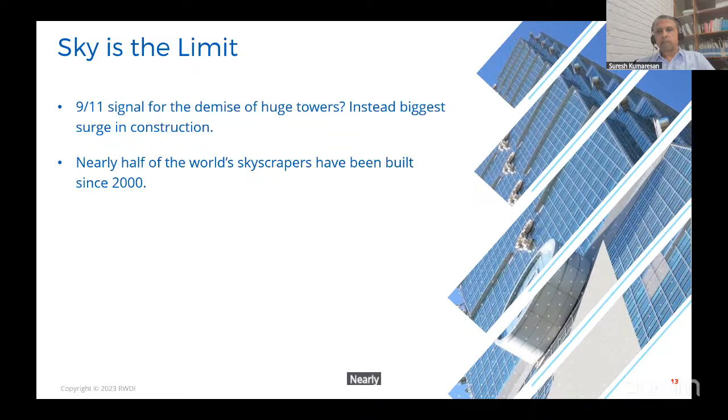Now we are even thinking about vertical cities. We want to live and die basically in cities like this: live on one floor, shop on another floor, attend parties on another floor, etc. The idea looks a bit crazy, but it can happen. There are projects like that at least in the planning stage at this point.

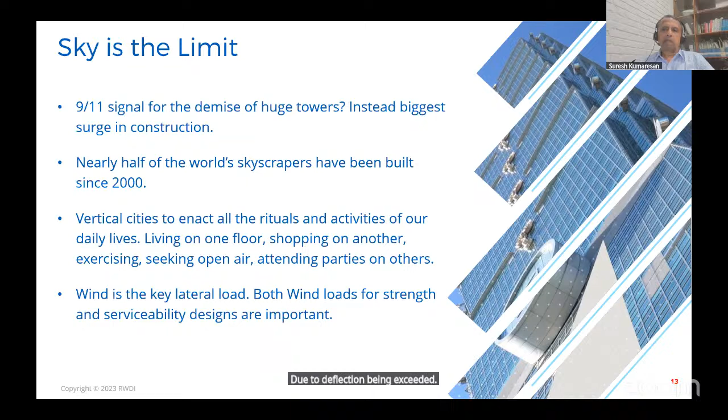As you all know, wind is the key lateral load whenever buildings are super tall or taller—roughly more than 30 or 40 floors is going to be governed by wind. Previously we used to talk about only strength all the time, but nowadays serviceability is also a serious issue, because sometimes a building may pass strength-wise but may not pass serviceability-wise due to deflection being exceeded or even acceleration having some issues as well.

So now you can see why we are interested in such tall buildings, and wind loading on tall buildings. You can see when wind is blowing, there is a chance that people can perceive motions.

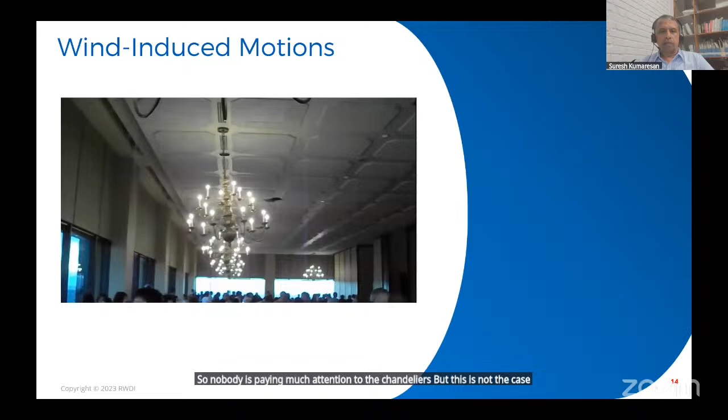This is one of those videos taken not on a super tall building, maybe 170 or 180 meters tall. When the wind is blowing, the chandeliers are moving, but people are not noticing, maybe they think there's some party going on, so nobody is paying much attention to the chandeliers. But this is not the case when you are alone in a bedroom. If something is moving, you immediately know something is moving and you'll be really alarmed.

So it's all about the perception and your surrounding scenario. Because if you are in a group, you may be tolerant to take more motion, but if you're alone, you're not willing to take more motion.

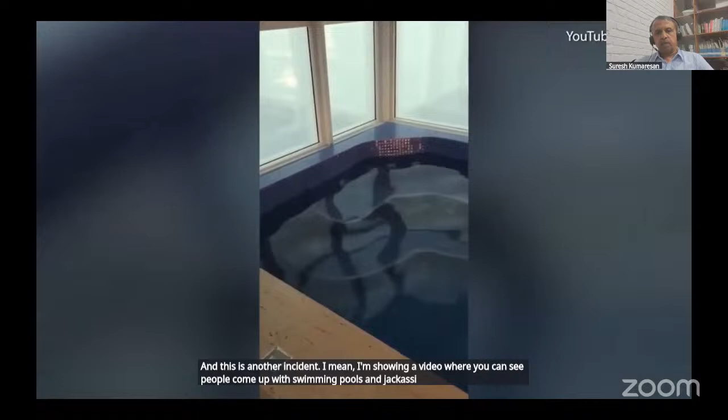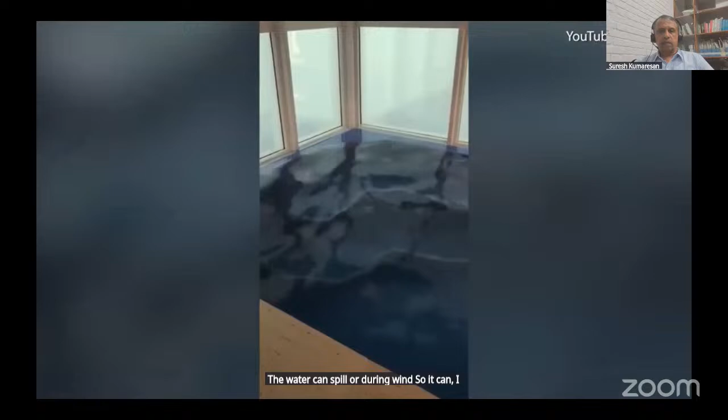And there's another incident, I'm showing a video where you can see people come up with swimming pools and jacuzzis without realizing that if you don't have a proper parapet, the water can spill over during wind. In this case, it is one of the worst scenarios, it is going over the swimming pool, and essentially the water is going inside the apartment.

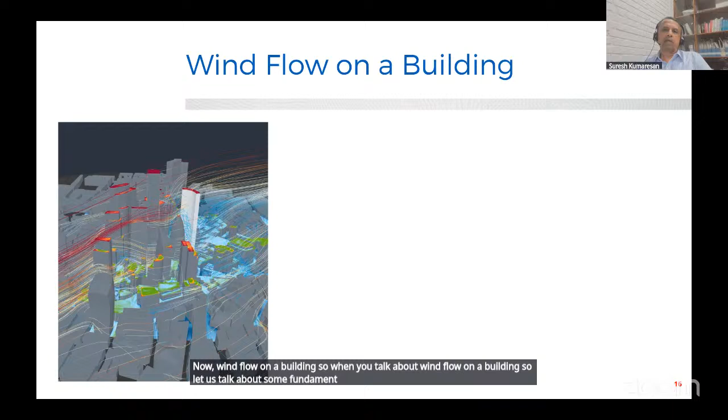Now, wind flow on a building. When you talk about wind flow on a building, let's talk about some fundamentals. When you look at the code or think about estimating load on a building, you're going to be looking at basically along-wind load. That means the wind is pushing the structure in the direction of the wind.

You can also get some loading in the crosswind direction, due to vortex shedding. That is also very significant, and you can also get torsion. So all three of these components will be acting all the time. The proportion at which it acts is a different question, because it's not going to be happening that all of them peak at the same time. But it will happen to a certain extent, when 100% along-wind is happening, maybe you may not get 100% crosswind, etc.

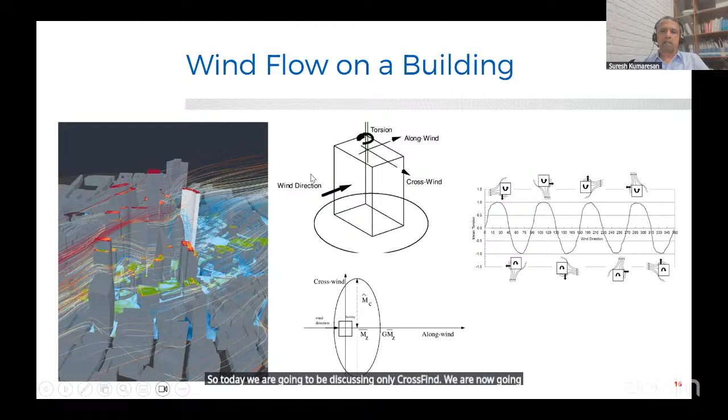Not going into the area of load combinations, but all three will act all the time. As you know, certain codes avoid this, saying only along-wind 100%, only crosswind 100%, which is not completely correct because all the time you can get all three components. So today we are going to be discussing only crosswind, we are not going to be addressing the rest of the types of loading.

So crosswind phenomena, let's talk about some physics here, which we just discussed. When you have along-wind, it's going to push the building, so the building is going to oscillate in the direction of the wind. This is well addressed in the codes, regardless of which code, Canadian or any type, I think these are well addressed. You can reasonably compute these things quite well using codes.

The only issue is if you have a lot of surroundings, obviously your load is going to decrease. I'm quite sure you won't be able to get out of the code for that, you have to do wind tunnel tests. But other than that, you can get a fairly good idea about along-wind load from the codes and standards. And then you go to the crosswind loading.

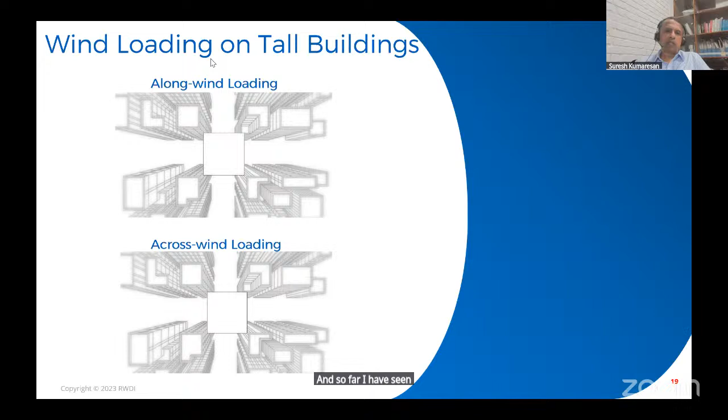And so far I have seen even more than 3 times compared to along wind in certain cases. So let us delve a little bit deeper into it.

So here I'm showing some spectra. Spectra is like the energy content in your signal. Whenever you measure something in wind, it is going to be some kind of time series, so if you want to know what's inside it, you go to the frequency domain and plot the spectra. You'll come to know whether the energy is concentrated at certain frequencies or spread out across various frequencies. If you look at along wind, the spectra is more broad-banded, with energy content at different frequencies.

Actually my x-axis is reduced frequency, a kind of non-dimensionalized frequency. You multiply the frequency with the dimension divided by the velocity, and that's the reduced frequency. You can see it is spread out quite a bit—this is more like white noise. Not exactly white noise, but similar to it, I would say.

But then when you look at the crosswind spectra, you can see it has a very high hump at a certain frequency—energy is all concentrated in certain portion. So if your building's frequency also falls into that same portion, that is when the trouble starts. You can get huge oscillations and huge loading as a result.

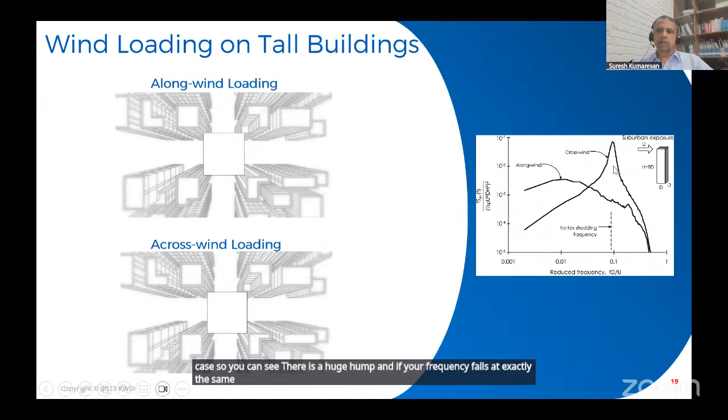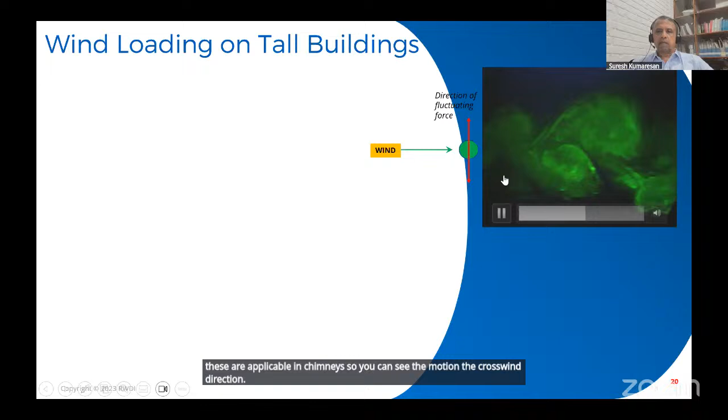So here again, the vortices are being shed around a circular cylinder. Wind is coming and it is oscillating in the crosswind direction—this is applicable in chimneys, for instance. You can see the motion in the crosswind direction. When you record the time signal, the time series, you'll see it's like regular vortex shedding—a peculiar frequency at which these vortices are being shed, and you can easily calculate the rest of it.

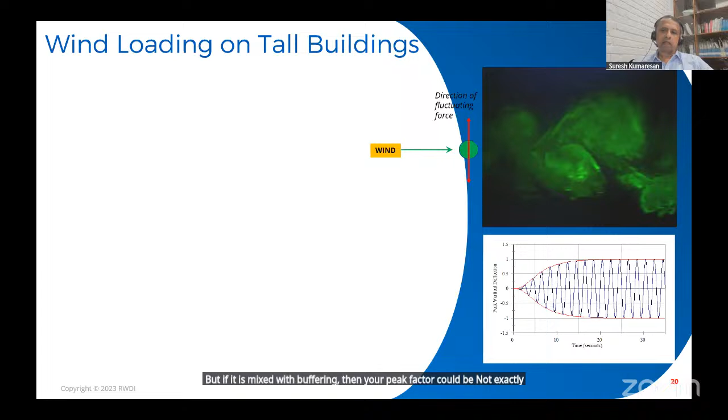If it is pure vortex shedding, then your peak is also very easy to find out. But if it's mixed with buffeting, then your peak factor may not be exactly 1.4—it could be 3.5 sometimes. So once again, this is the phenomenon: alternate shedding of vortices on both sides of the body causes it to excite in the crosswind direction when wind is blowing, which causes this particular hump. The intensity of this hump depends on many other factors, which we'll discuss in later slides.

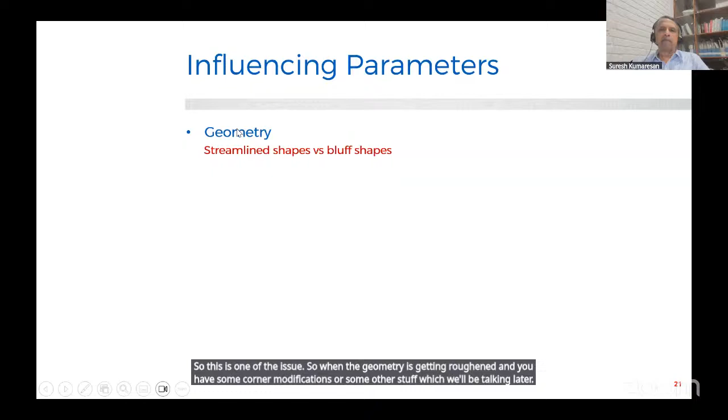Now let's look at the influencing parameters—what factors affect that hump. Definitely geometry is one: streamlined shapes versus bluff shapes. Since today's focus is tall buildings, we won't talk about other structure types, and tall buildings are more or less bluff bodies—they have sharp corners, cuts, fins, all kinds of shapes. This is bluff, not like a streamlined shape such as an aircraft wing. So when the geometry is roughened, or you have corner modifications or other techniques we'll discuss later, you can have an influence on the crosswind oscillations.

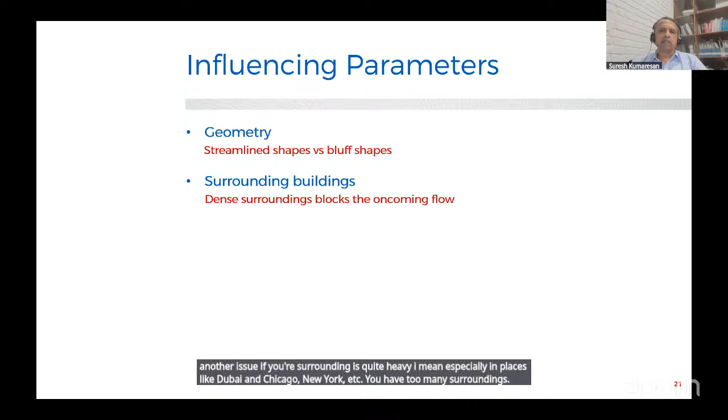Surrounding is another issue. If your surroundings are quite heavy—especially in places like Dubai, Chicago, New York, etc., with too many surrounding buildings—the surroundings will help reduce the crosswind issue because they disturb the oncoming flow and the vortices. This creates more chaos inside the city, which is probably helpful for reducing crosswind issues. Upwind fetch roughness, that is oncoming turbulence—the rougher the terrain, the higher the turbulence.

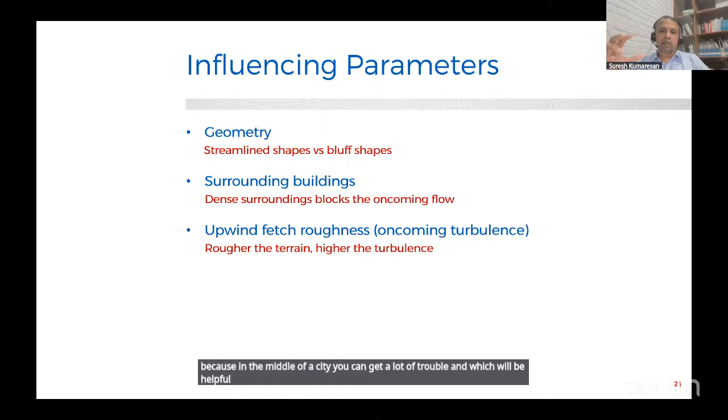Higher turbulence may reduce the vortex shedding intensity, which will be helpful. So if your building is sitting right at the edge of the seashore, you can definitely have more crosswind compared to the same building sitting in the middle of a city, because in the middle of a city you get a lot of turbulence, which helps reduce the intensity of vortex shedding on a tall building.

Structural properties have their own influence - frequency, stiffness, mass, damping - all of these have some influence as well. So it's quite complicated if you think about it, because it's not easy to predict this. We'll talk more on that - complex interactions between all of these parameters.

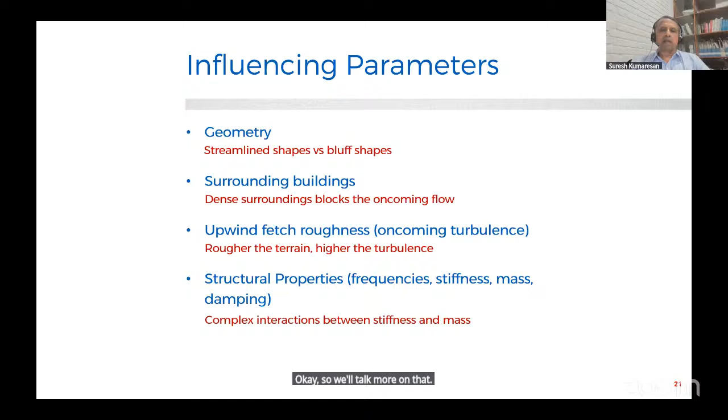Now a little bit more theory - the Strouhal number. People might be thinking, can we predict the vortex shedding frequency? It is possible to predict it, so that if you're planning a building with certain dimensions, you can estimate at what velocities this building will have some problem - you can estimate this in advance using this technique, the Strouhal number.

This equation is: S, the Strouhal number, equals F times B divided by U. F is the vortex shedding frequency, B is the width, and U is the wind speed. You can easily calculate at which velocity or frequency the vortex is going to be shed from this particular body - entirely depending on the speed, width, and the Strouhal number.

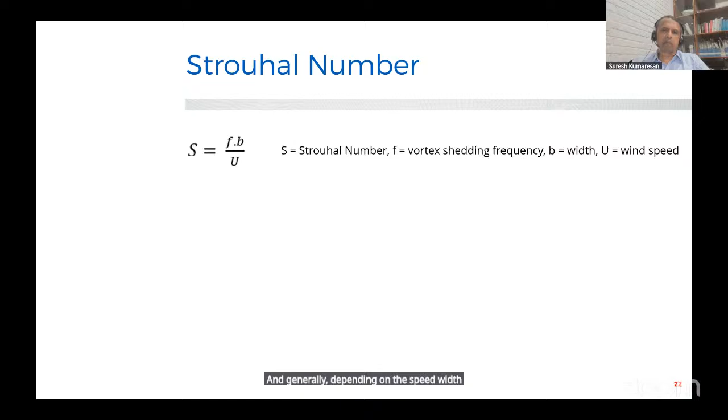The Strouhal number is typically 0.1 for square and rectangular buildings, and about 0.2 for circular shapes, because the shedding is very different for a sharp-edged object compared to a circular object. So regardless of how many times you do the experiment with various B's and various U's, you're going to get similar numbers - the Strouhal number for a particular shape.

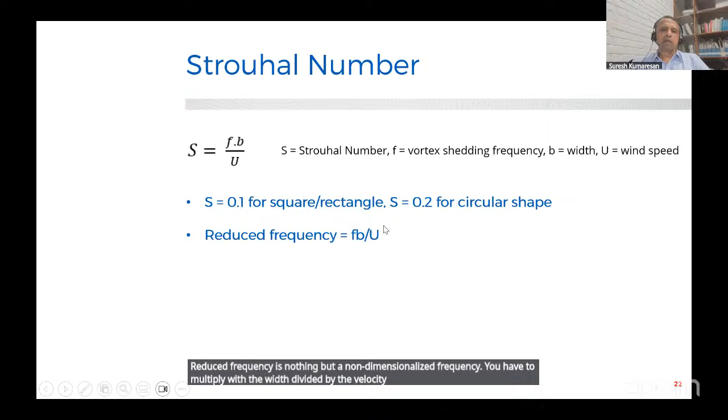There is a beauty to this equation - this has all been proven long back by fluid dynamics researchers. Reduced frequency is nothing but a non-dimensionalized frequency - you multiply it by the width divided by the velocity. So there is no unit for the reduced frequency.

You can say the reduced velocity is the inverse of the reduced frequency - you just invert it, that's the reduced velocity. Why I'm saying all of this is that when you're looking at codes, they may sometimes mention reduced velocity rather than reduced frequency, especially the Australian code.

10 is being used for squares and rectangles - you can see the hump in the Australian code is always around 10, since that is 1 divided by 0.1. That is the reduced velocity. 5 is for circular cylinders, which is 1 divided by 0.2. So expect to have some hump in the spectra at these reduced velocities - that's what the Australian code is showing. I'm not aware of any other code which shows such spectra.

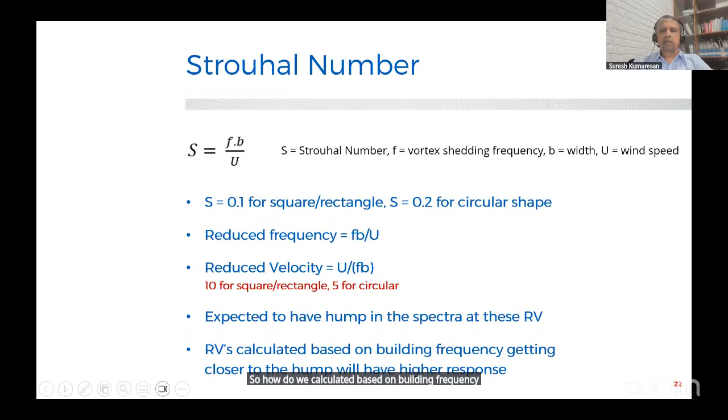So the reduced velocity is calculated based on the building frequency. Getting closer to the hump will result in higher response. As I said, the vortex shedding frequency and the building frequency coming closer to each other can produce a very high response.

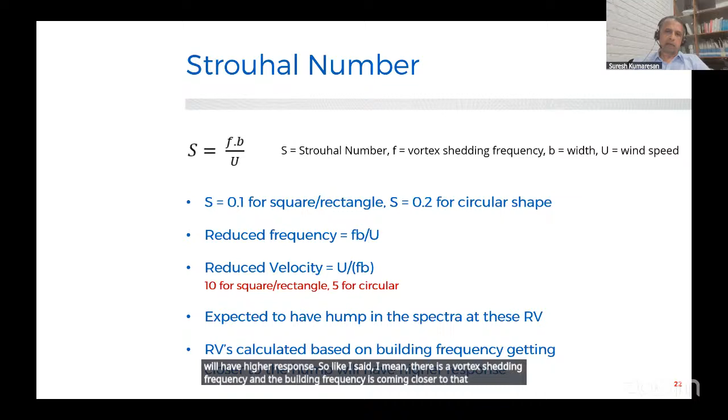There's another parameter you need to be aware of too. The Strouhal number I mentioned before is more of an aerodynamic parameter because it depends on the shape. But this new parameter is not based on shape at all - it has nothing to do with shape, it's all about the structural properties.

So m is the mass, and zeta is the damping - this is called the mass damping parameter, the Scruton number. If the mass is less, obviously the structure will move in wind, and if the damping is less, it can also move in wind. So this parameter is very important - you have to look at both aerodynamic and structural factors to determine whether there's going to be significant motion or not.

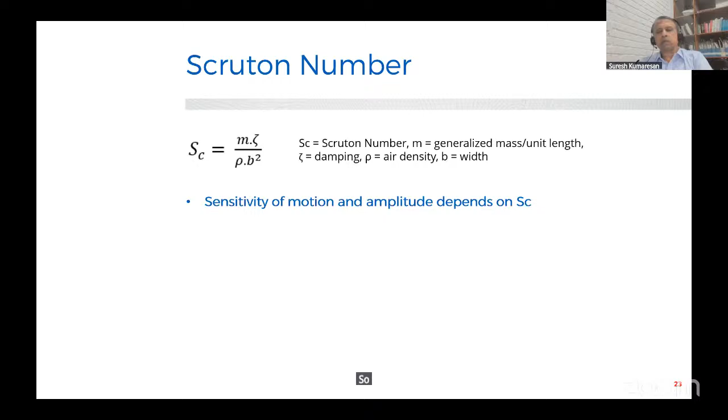Sensitivity of motion and amplitude depends on Sc, the Scruton number. I think we have to pay some attention to that. If the structure is very lightweight with low damping, we have an issue, especially with steel structures. Steel structures typically have low density, low mass, and low damping. So likely the Scruton number is going to be not in a safe region if we are not careful.

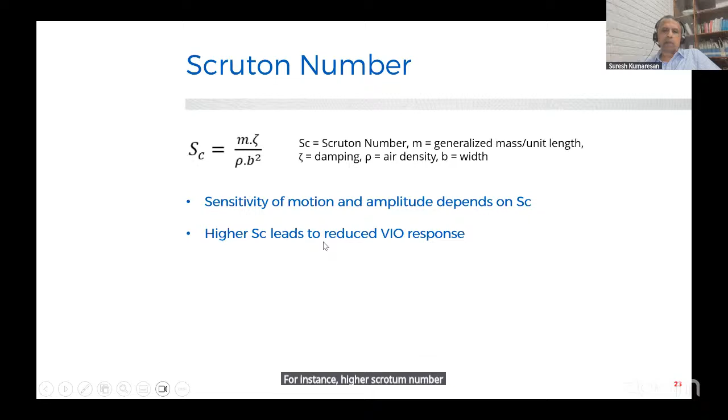For instance, higher Scruton number leads to reduced VIV response. This is kind of a rule of thumb: if the Sc is above 5, there is a possibility of positive aerodynamic damping, and a force spectrum from a rigid model test is probably sufficient for response prediction.

So aerodynamic damping is another parameter, because we always talk about structural damping. Whatever damping I'm showing here is structural damping, but you can also get aerodynamic damping. If the structure is moving in wind, the air can push back on the structure, which can give positive aerodynamic damping. But when the mass is too low and the Scruton number gets reduced and reduced, there is a chance of getting negative aerodynamic damping. It will basically take away your structural damping and the response can increase significantly. So that is a danger.

Fortunately, most of our tall buildings are heavy. As I always talk about the mass, any typical tall building you take, even one floor is a minimum of 500 tons. Nowadays we are seeing 2,000, 3,000 tons per floor, even 5,000 tons I have seen recently for one floor. So that's significant. When you calculate Scruton number, you'll see these are higher Scruton numbers where the motion chance is less, but still you can get some positive aerodynamic damping because it's going to push the structure back. So there's a chance, depending on the slenderness of the building, and if the building is too slender, that is when these things kick in.

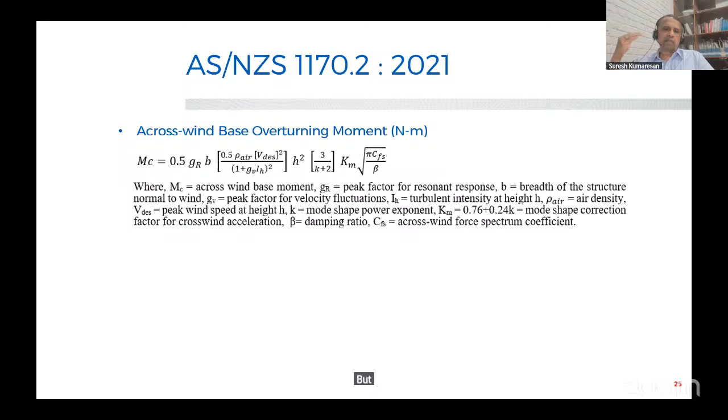But now they have an equation - it's very simple, you can just plug in the numbers and get the CFS. You can also calculate the static crosswind force using this particular equation. I'm not going through the equation in detail, but it's very simple - all the parameters are well written in the code.

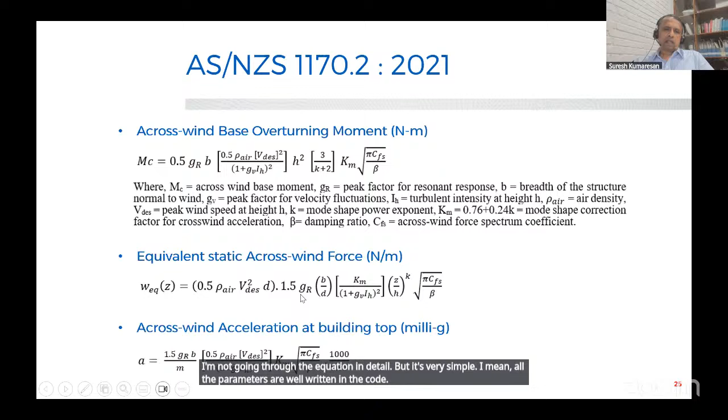Lastly, crosswind acceleration - this particular equation is not in the 2021 code, but I derived this equation based on the information from the other two. One could derive this. Previously, in the 1989 code, the Australian code had an equation for acceleration, not exactly the same but very similar, I guess. But you can easily derive it because you know this is mostly inertia, so mass into acceleration is your inertia. Likewise, you can compute backwards the crosswind acceleration equation.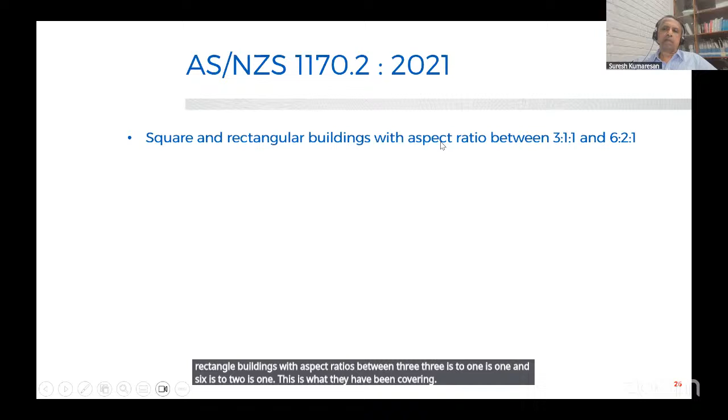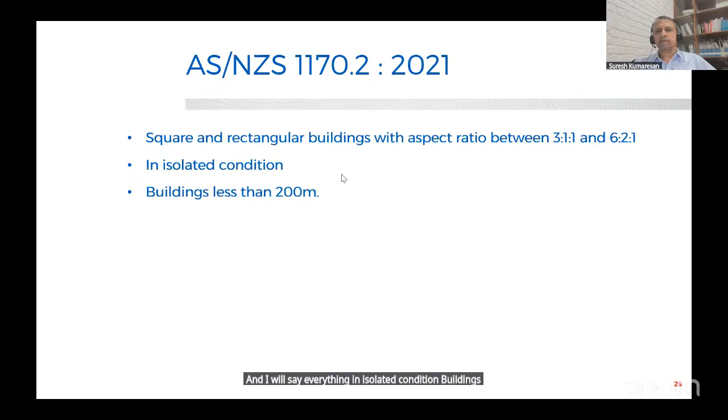Square and rectangle buildings with aspect ratios between 3:1:1 and 6:2:1 - this is what they have been covering. They don't have any coverage for the rest of the aspect ratios, and also everything in isolated condition, buildings less than 200 meters. That's also because nowadays most of the buildings are above 200 meters. So the problem is buildings taller than 200 meters with unusual shapes. No building is nowadays square and rectangle and with surroundings.

So what do you do? That is very difficult to answer, but at least I would say you can utilize these equations as a preliminary estimate. That's what I would do.

There's an example which I think is taken from one of my papers. I'm plugging in certain numbers like height, width, and terrain, etc., to calculate crosswind load on this particular tower. Here, the aspect ratio is 6, 150 divided by 25. You can step in line by line, using basic wind speed, terrain multiplying factor, and the rest of the parameters like peak factor, turbulence intensity, etc. Then you can easily come up with your MC, which is the base moment, crosswind moment.

I cannot say this is a huge number, depending on the case. You can also calculate the crosswind acceleration - I have calculated it, and in this particular case it is 33 milli-g. So if it is a residential tower, this is completely out of the comfort line because you want it to be within 18 milli-g. So you are already at 33 milli-g - this is not very good.

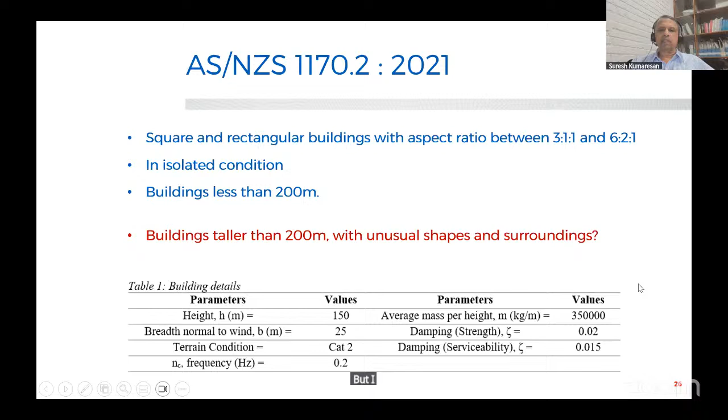But the issue here is, again, I mentioned the width, but I never said anything about the shape here because I'm assuming this is a square shape. If it is not square, then the trouble starts, because you don't know whether you exactly hit this number when you do a wind tunnel test. If the shape is different, obviously your number can be different.

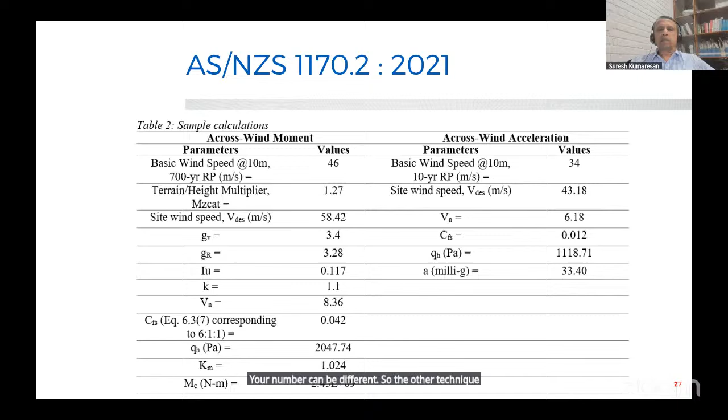So the other technique one can use at the preliminary stage is CFD. We do have our own CFD package, Orbital Stack, which can be utilized to calculate the crosswind. There are lots of advantages because you can have all the surroundings, the proper shape, and you can simulate it for various directions and calculate the crosswind - whether there is any crosswind chance or not, you can find that out. This is quite good because it takes care of the actual geometry including the surroundings, so you're basically avoiding a lot of uncertainties in terms of the shape or the surroundings. I would say this is one of the best tools to utilize at the preliminary stage, not the final stage.

There are models one can use. When you are talking about crosswind, definitely you have to use the LES method for your simulations. So you can see certain simulations that we have done at our lab in estimating crosswind oscillations of structures.

Now this is the ultimate one. So you have the preliminary assessments already done, now you can move into wind tunnel testing. In wind tunnel testing, typically we start with the rigid model test. So you can do rigid model tests. When you talk about overall loading on a building, the loading is two types.

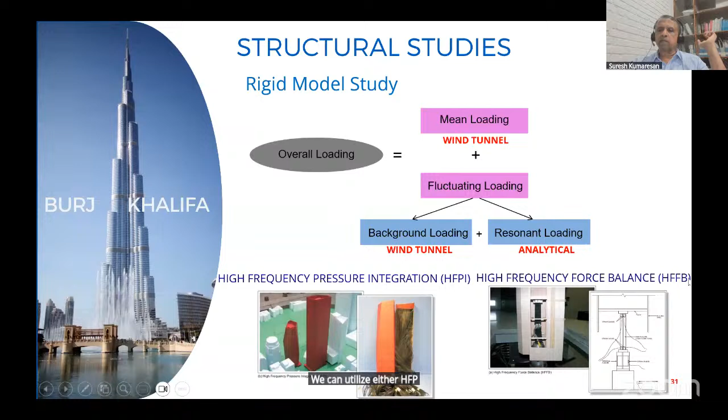Or in some cases, you also have to get the resonant loading from the wind tunnel by using aeroelastic modeling. So in Burj Khalifa, we first did the rigid model, then later the aeroelastic model. This is the aeroelastic model that you are seeing with the crane in place. The crane is also aeroelastic - it has its own spine, and we wanted to find out the tie load, which is the interaction between the crane and the building. So we had to get the tie load happening in this crane.

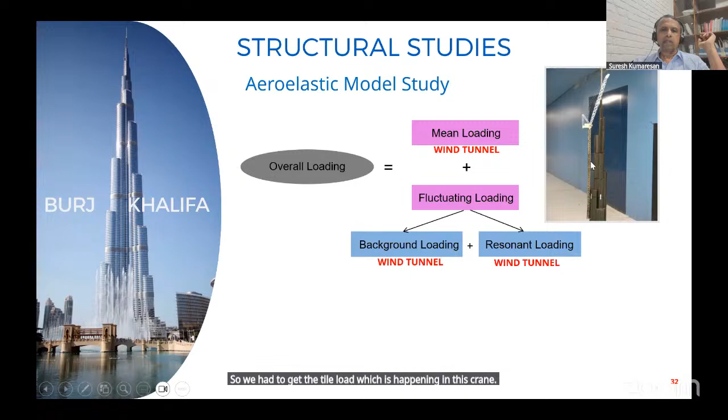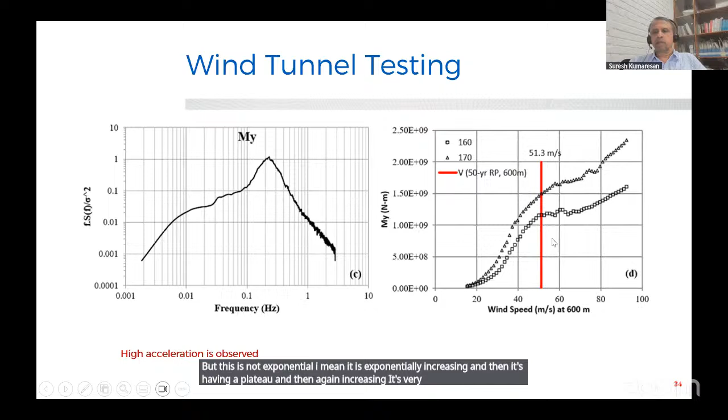This is another case, again it's more like a rectangle. In this particular case, the height is 170 meters, the height by width is 4.5, and Scruton number is 6.5.

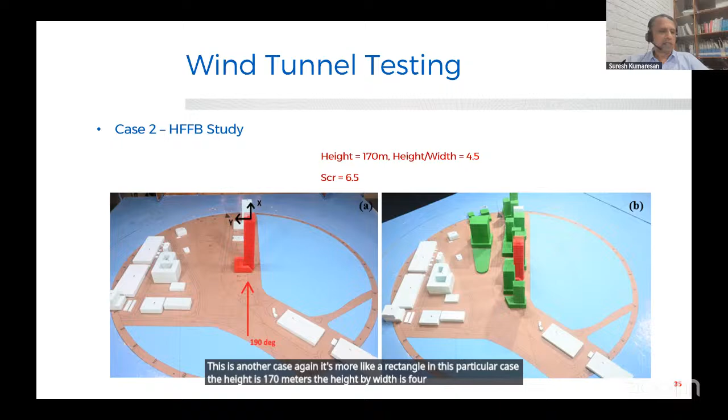Then you can see the response, you can have a double hump. MY has two humps: one when the wind is coming at about 100 degrees, you are getting a vortex shedding hump, and another one at 280 degrees, again you have another hump. Exactly the same thing happens in MX, but for opposite angles. So you have one at about 200 or 190 degrees, and another one around 10 degrees.

You have two humps, so you can easily notice where this vortex shedding is happening, whether it is too high or not. In MX, these peaks at 190 degrees are too huge compared to your along-wind, which is around 100 degrees. The number is around 1.8 versus this number is 3.5, so it's almost getting double. This crosswind response is double in comparison to the along-wind response.

So this is a problem. If you just follow the code and try to estimate the along-wind, then later you realize that your loads are too high, and now what to do. That's why you need to be careful right from the beginning in terms of whether the shape is going to have any crosswind issue, how do we arrest that, and what techniques one can use.

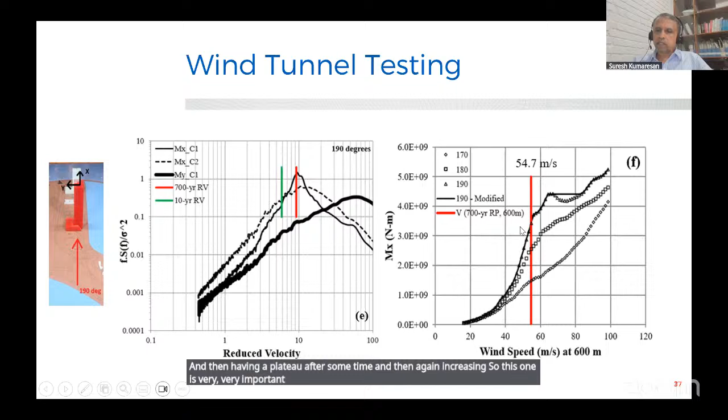It is just taking off and then having a plateau after some time, and then again increasing. So this one is very, very important. This is where the vortex shedding is happening, which is causing the response to be higher.

Now a little bit more on the crosswind spectra, because we have studied quite a bit on it. Depending on the shape, the spectra itself will tell you the story in terms of whether it is really going to be too much or not. If you look at 6:1:1, the spectra is very peaked, that's the solid line. But as soon as you go into 6:2:1, that means the wind is coming across a broader direction.

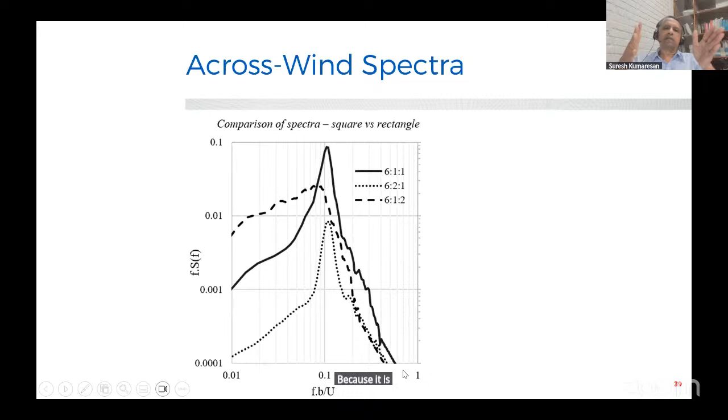You still have a hump, but that hump is very low compared to the square cross section. So the rectangle cross section is giving less of an impact for the crosswind in comparison to the square cross section, which gives very high impact. But when your wind is coming across the narrow direction, your response is more broadbanded because it is getting attached to the side, so it is not giving too much crosswind.

You can also see the aspect ratio impact, because from 3:1 to 4:1 to 5:1 to 6:1, the 6:1 is getting more and more peaked. When you go from 3 to 6, each time it is increasing. So when the slenderness is increased, you are going to have serious trouble in terms of crosswind oscillations.

I'm not going to go through the rest. There are lots of comparisons between the code and the wind tunnel and so on, which I think if you're interested, I can send a paper on it.

So here's another aspect, more on plan dimension. This is a rectangle, so you have a 2:1 rectangle - you can see A is all 2:1. Then B is a 3:1 rectangle, and then 4:1. So vividly you can see the impact reducing and reducing, because here the wind is coming across the broader direction of the rectangle.

So when this aspect ratio is increased, from 2:1 to 3:1 to 4:1, you can see the 2:1 has the peaked spectra in comparison to 4:1. So what this means is if your rectangle is getting elongated, then your crosswind chance is decreasing, because the most chance is for a 2:1 rectangle in comparison to a 4:1 rectangle.

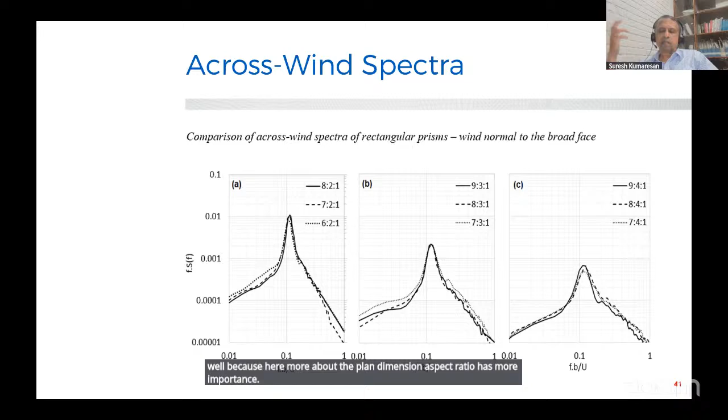Now, this is all good, but the trouble is we want to somehow eliminate or reduce this impact. That's where I think our ideas should come in. First of all, mitigation measures through geometric modification. If I am talking to a structural engineer, they may not have much impact on this particular issue - mostly the architects have a lot to say here. They can impart more impact on this particular aspect.

Look at what happened in Taipei 101. It was initially a square structure, but when we estimated the load and acceleration initially, we found out it was going to be huge. Plus, Taipei is a very high wind speed region, and we cannot build really 508 meters with a square shape, even with a damper, because the loads would be huge and we had to reduce both the loads and the acceleration. So we tried different shapes, and finally the shape of double step corner was accepted for construction.

The impact of that you can see immediately from this graph - this is the RMS value of crosswind shear force. You can see 1x10⁸ Newton is the RMS value for a square, compared to almost 6x10⁷ for this shape. And there is no inertia or anything here - this is purely the impact of the shape. So the shape can really do the magic in terms of reducing the impact of this vortex shedding.

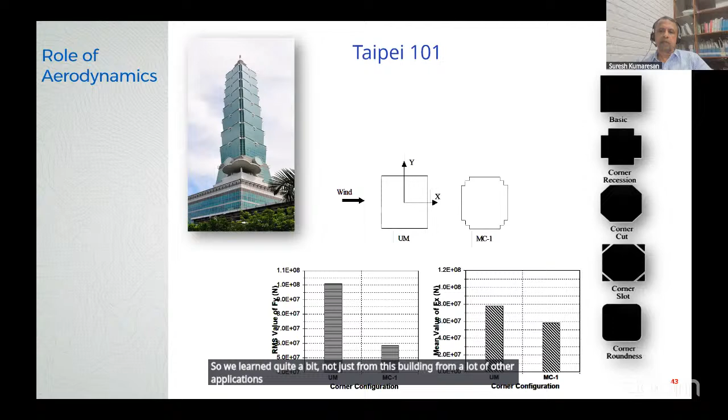So we learned quite a bit, not just from this building, but from a lot of other applications of aerodynamics as well, and then utilized that in many of our structures.

Look at this particular case. This is another interesting example where case one is an octagonal shaped building around 320 meters tall, and case two on the right side is almost a square structure, 180 meters tall. Now look at the statistics of this.

This is where it is important. CD bar, the mean drag coefficient, is 1.3 versus 0.6 for the octagonal shape. The load is almost half now, the mean load. And when you look at CD tilde, the RMS, it's 0.43 versus 0.1, about a quarter of this.

Then if you go to lift, meaning crosswind oscillations, the RMS fluctuation is 0.97 versus 0.06. It's almost not there, basically killed. There's no vortex shedding, it is gone. So it is all about the shape.

Shanghai Tower is basically designed in the wind tunnel. We had the option of twisting this tower to various degrees to reduce the load. You can see 120-degree twist, 180-degree, 100-degree twist, etc., to see what kind of twist gives the reduced load.

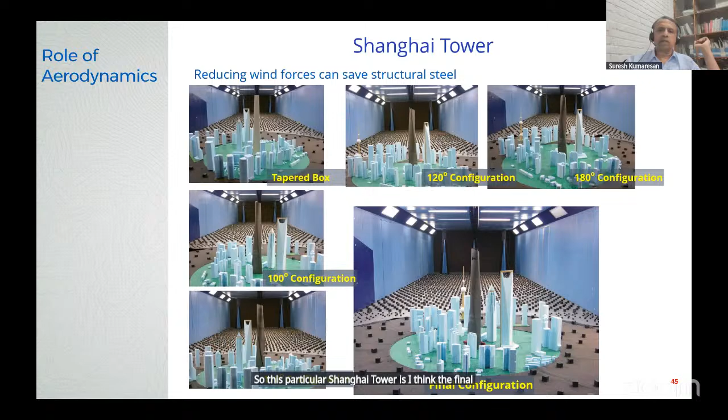And plus there is a hole at the top. As you can see, the World Financial Center just beside it is also one of our projects done long back, which also has a hole at the top. This could have huge impact on the base moment, because the top one-third gives a lot of base moment on any structure. So the final configuration of Shanghai Tower is around 120-degree twist, which had the least load on that tower.

This is picked up from the Tanaka et al. paper, again showing the hump of the spectra getting hammered down with different shapes. The steps and twisting are always nice because it gets the wind confused, since there's no clear shape as you go up the structure. So it is getting hammered down, and this will likely have the least response.

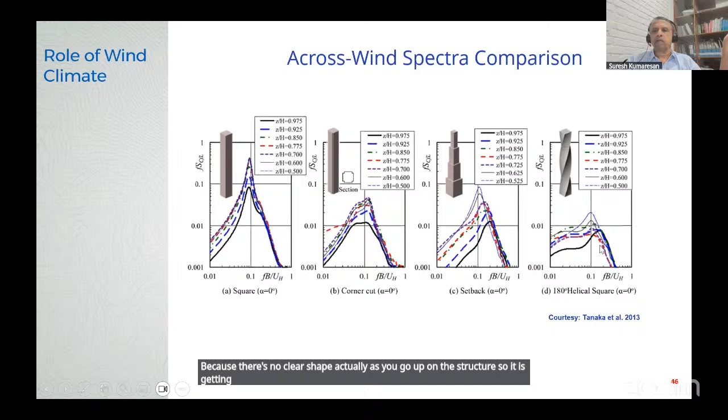Look at some of these towers: 364 meters tall, 500 meters, 275 meters - none of these towers have any crosswind issues, just because of their shape. You can see the shape is kind of rounded, with a hole at the top. Here the corners are chamfered, here it is rounded.

There are many new structures coming with similar ideas - you can have steps, setbacks, etc. Basically you don't want to give a constant shape to the structure. You want to confuse the wind, not the structure - well, you're confusing the structure as well.

But here again you can see the corners chamfered, stepped, and you have some openings as well. So there are many techniques one can use. This is something we have to tell our architectural colleagues to look into very carefully whenever they come up with slender structures.

So I came up with a table of what we can do: corner modifications. You can do all these kinds of shapes which are good to reduce crosswind response. Every shape has its own story, but typically all of these shapes will work depending on how far you can round the corner. Corner modification of the order of 10 to 20% of the width is required to achieve a noticeable impact.

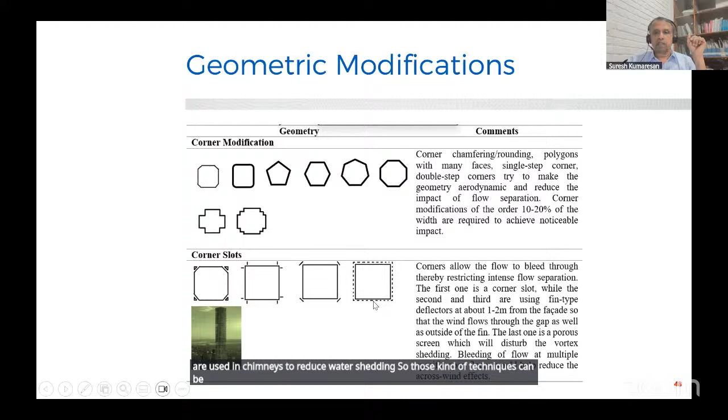You can have corner disturbances - sometimes protruded balconies would be good. You can see various cases where fins and balconies, especially at the corner, help - if you have fins in the middle of the structure there's no use, because vortices are being shed at the corners. So you want to do something at the corners, about 10 to 20% of the width.

You can also have tapering, twisting, roundness - we've been seeing such twisting and tapering nowadays on a lot of structures. Another technique being used nowadays is rooftop features - some structures have confusing rooftops. Nowadays we have crowns and all kinds of stuff at the top of the roof, which has its own impact in reducing crosswind. So geometric modification is extremely important.

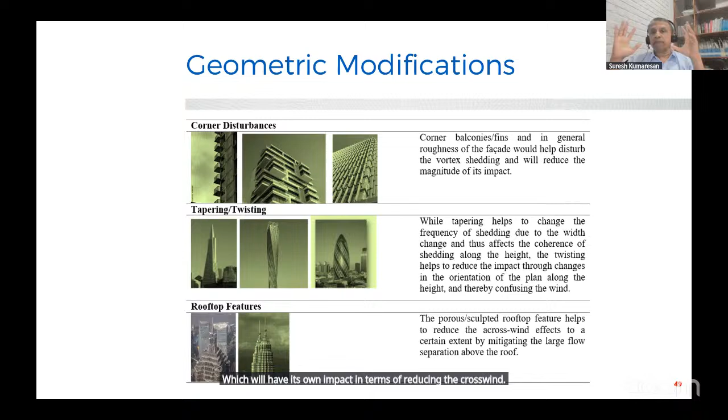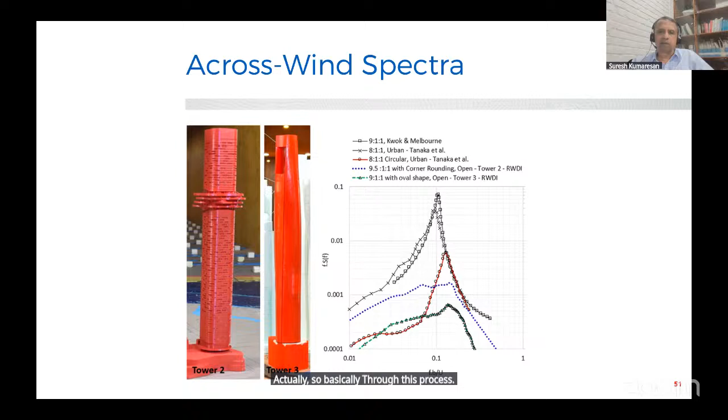And there are other cases. In this case, you can see one is a rounded edge with some protruded out slabs and things like that, which again is helpful. Then this particular structure, which I showed before, has a hole at the top with round. You can see these spectra: one is the dotted blue line, which is very low hump, and then you have another one, 9:1:1, the green line, which is also very low hump. So through this process, you're basically killing the vortex shedding on the sides of the structure.

Now we come to structural modification. Structural engineers can also do some modifications on their structure, but the trouble here is the spectra is peaked, so you have an issue with the load. You may think, let me stiffen the structure or flex it a bit to avoid this issue. But when you do that, you may have another problem from acceleration, because acceleration may go higher or lower. So it's not easy to fix it structurally - you need to think carefully, because fixing one thing may create another problem, especially with crosswind issues.

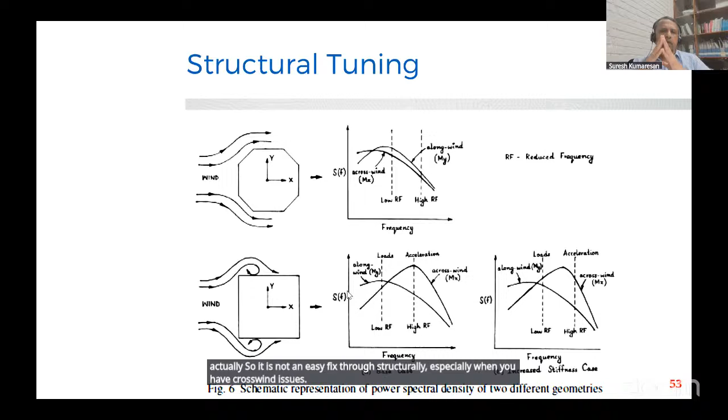That is why geometry is the first line of attack - that's the easy attack where one can really do the magic. But here too, you can play with this, do the sensitivity. Increasing mass is not an option for reducing crosswind load, but you can reduce the crosswind acceleration, because increasing mass will always help reduce acceleration, but not load. Load will stay exactly at the same point.

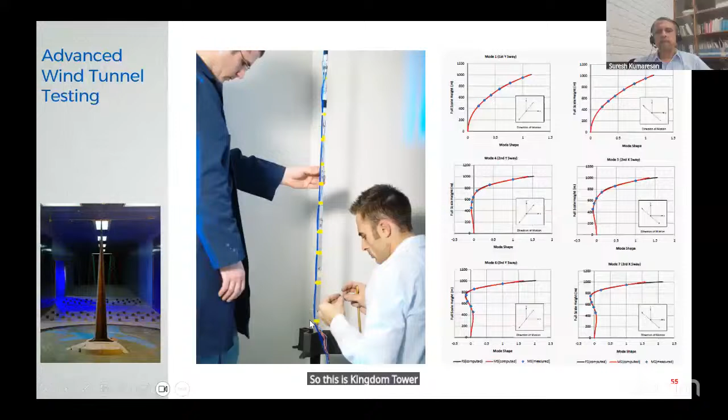And you can also do advanced wind tunnel tests sometimes. You can have an aeroelastic test to understand if any positive aerodynamic damping is coming into picture, and you can take advantage of that to reduce the response of the structure through positive aerodynamic damping. So this is Kingdom Tower in the tunnel, and this is an aeroelastic model - I'm not going to explain this in the interest of time.

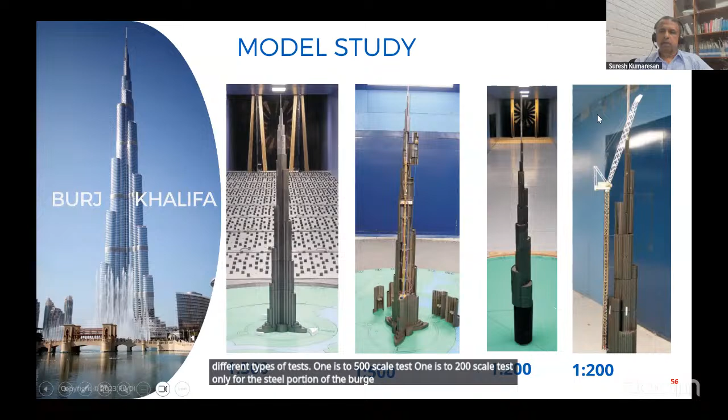You can see the Burj Khalifa went through several aeroelastic studies as well, and we benefited from those studies. We reduced the load and reduced the acceleration by doing aeroelastic studies, as I've shown before. We did a number of different types of tests: one at 500 scale, one at 200 scale only for the steel portion of the Burj - that was studied separately. We also studied the Burj at a large scale, a bigger model, to understand the Reynolds number sensitivity.

The last item in my presentation is supplementary damping. So you played with the geometry, you played with the structural properties - everything is helpful, but you're not there yet. So the last option, or sometimes even the first option, is to look at the damping, because sometimes you can lighten the structure and then put a damper to arrest the motion. That's another way, especially in cities like New York, where there is no lack of space.

You don't want to reduce the interior space - you want to keep the same space and go taller. The building could also be lighter over that part of the world, so it can move, so you put a damper at the top. There are a number of buildings having dampers. So roughly speaking, the damper goes either tuned mass damper or tuned liquid column damper.

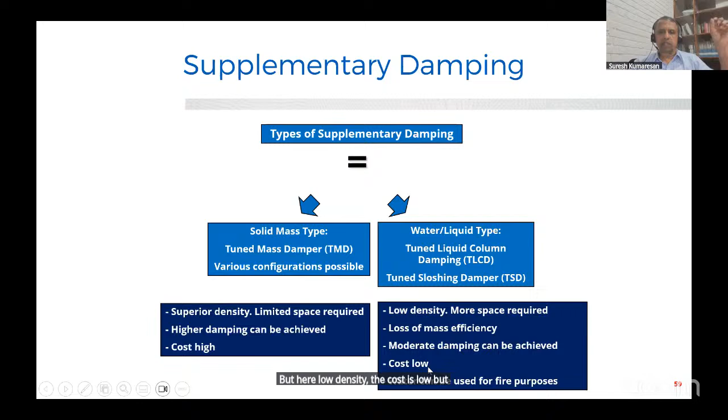I'm not going to be talking about other types of damper. This is superior density - cost is a bit high, but you can get higher damping. But here, low density, the cost is low, but you cannot get too much damping out of it. Still, you can fairly get 2, 3, up to probably 4% extra.

Taipei 101, everybody knows. I think I'll quickly go through this. You can see the damping.

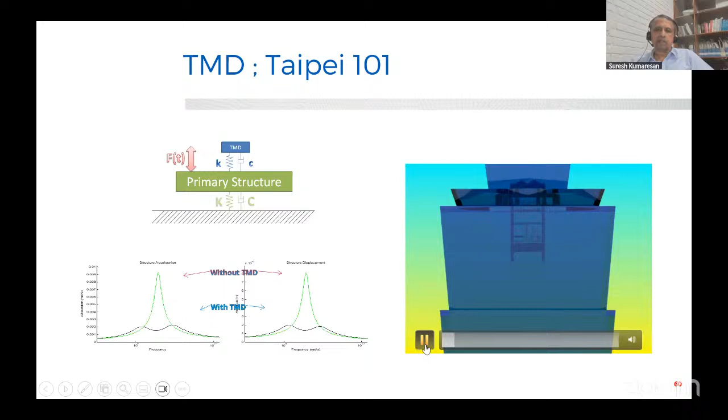One solution: this is the damper motion during typhoons. We have been monitoring this damper for a long time, so we know exactly how it has been performing for the last 25 to 28 years or so.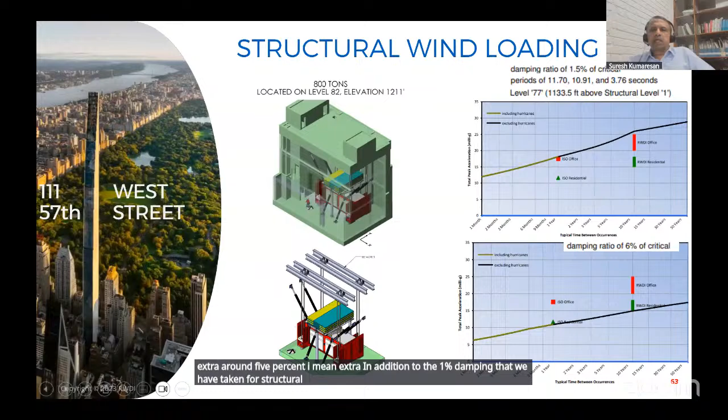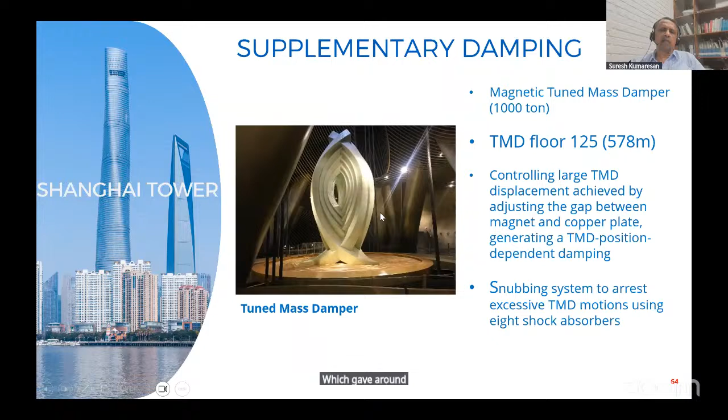Tuned sloshing damper: instead of having a tuned mass damper, you have water tanks. Nowadays I think everybody is having water tanks at the top, so they want to tune that water tank. You had to have a special design - it's not like just a water tank, so you had to do a proper design.

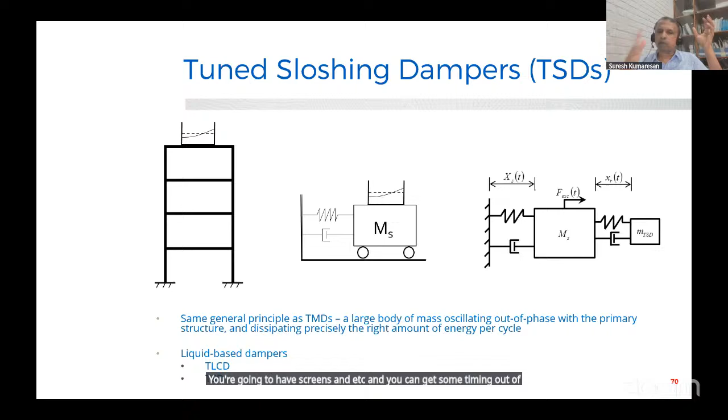You can have screens and so on, and you can get some damping out of this oscillation of the water through these screens and posts. So the fluid motion is damped due to the turbulence caused by flow restrictions like screens and posts and louvers, which can be utilized inside this water tank to get some damping out of it.

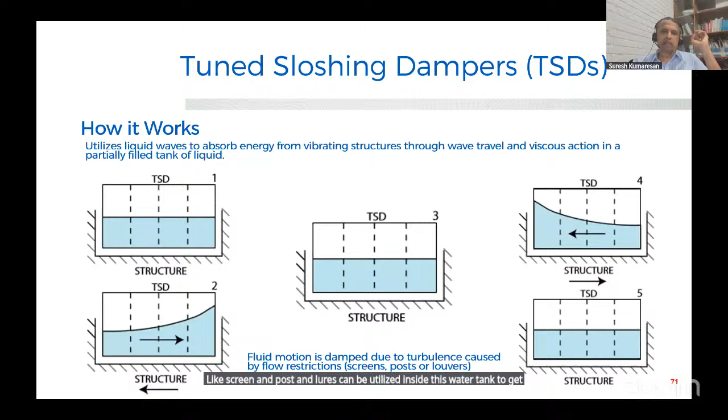So we do mock-up tests as well inside the tunnel. Once the damper is designed, we do mock-up tests in our lab to confirm that it's all going to work exactly the way we thought it is supposed to be working.

So this is the Random House New York damper - it's a tuned liquid column damper. I'm very close to finishing my presentation.

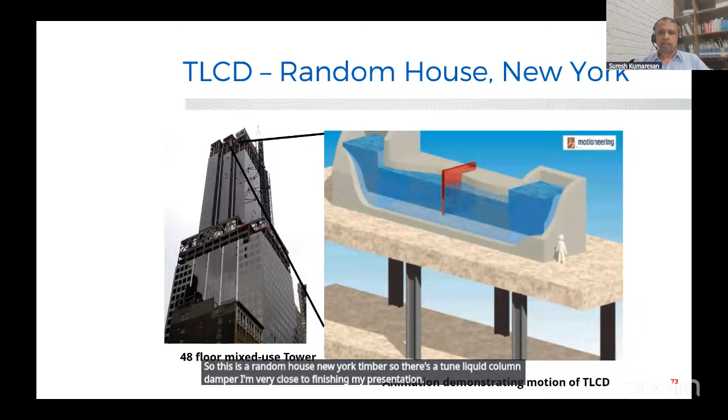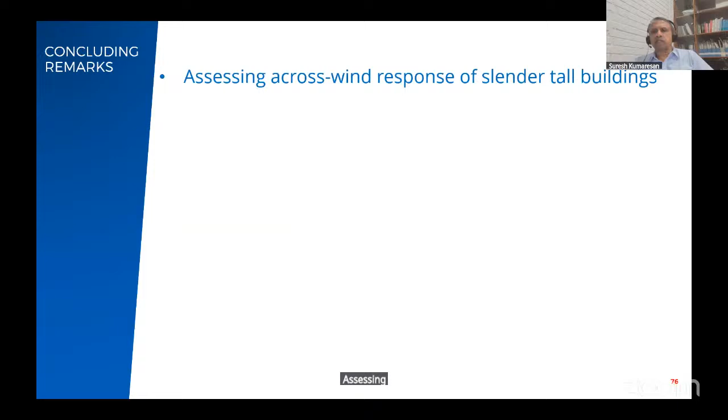That's about it, so concluding remarks. Assessing crosswind response of slender buildings is very crucial for design, because if you don't assess this in advance, it's a problem - if you think it's all about along-wind, that may not be the case. Then you will be taken for a ride later. Actually, you need to be very careful.

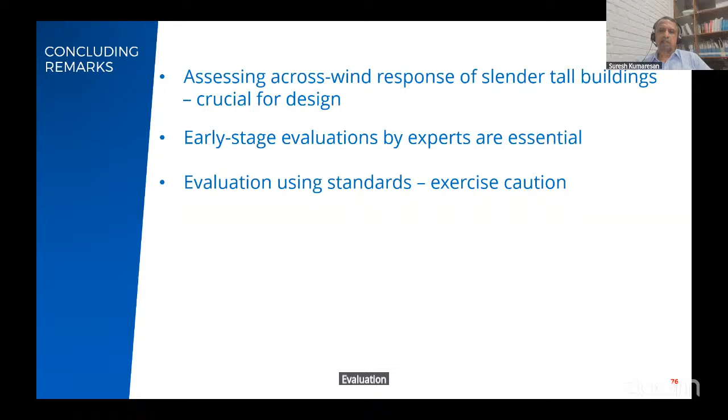Early stage evaluation by experts is essential. Evaluation using standards - exercise some caution, because it's not going to tell you the complete truth. It can give you some numbers, but you have to also keep in mind whether the shape is going to give this much number or even higher. And also, as you know, 6:1:1 or 6:2:1 is the maximum that I think the codes are covering.

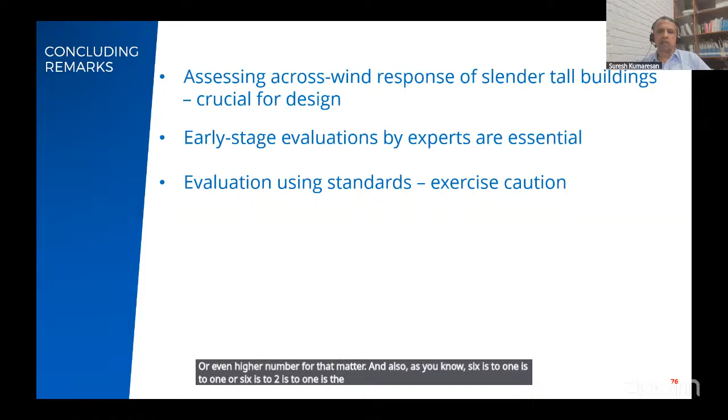CFD is a good tool for preliminary evaluation. If you have a good tool, this can give you some idea about how your shape is going to be impacting, how your surroundings are going to be impacting. Geometry and its surroundings will influence significantly - that's one of the issues, because we don't have any more squares and rectangles. We have structures with all kinds of shapes, with crowns, with openings, with fins, you name it. And you have all kinds of surroundings as well, so that's a serious issue to look at.

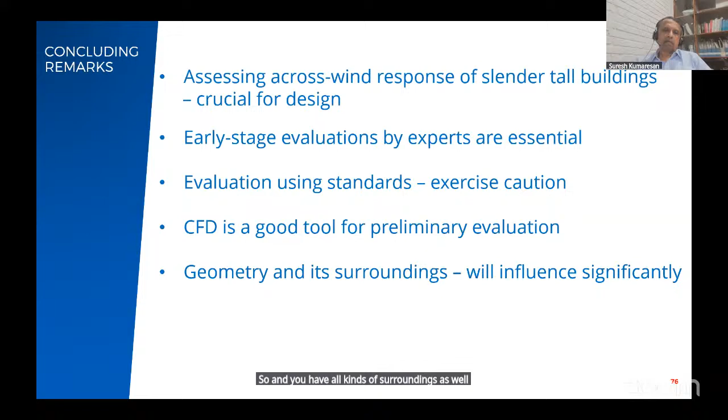Wind tunnel testing is the only solution, I would say. I don't think any other solution can really say concretely about crosswind impact at this point. No other tool is there yet that can concretely say, actually, I would say.

Finally, mitigation provisions can be tested to confirm - once you have a solution, you can easily test it in the tunnel and confirm that this is the solution that is going to be working, not only from a structural point of view, but also financially.

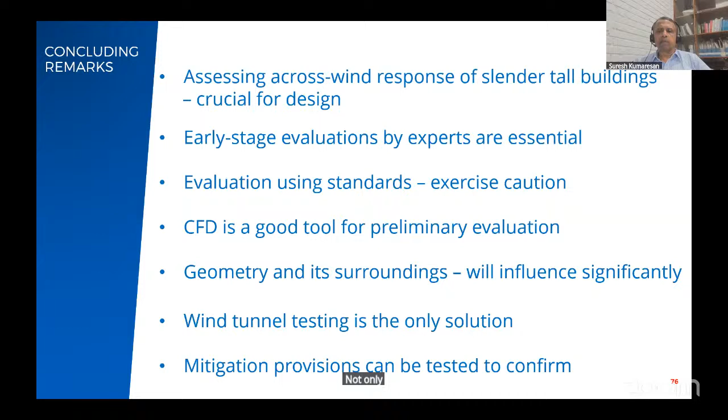That's about it. With that, I conclude, and I hope I finish on time. Now we have some time for questions and discussion.

Thank you. Right. Thank you, Dr. Suresh. Right on time indeed.

Thank you very much. Very insightful presentation, particularly the animations that you've used, which help to visualize the movements and the behaviors. You also touch on the mitigation measures with very interesting practical examples. And whilst you were saying that this is more of an architectural decision, I truly believe that we structural engineers are also at the heart of the decision when it comes to discussions around more material, more loading, more carbon, more cost, and so on. So it's a team's effort.

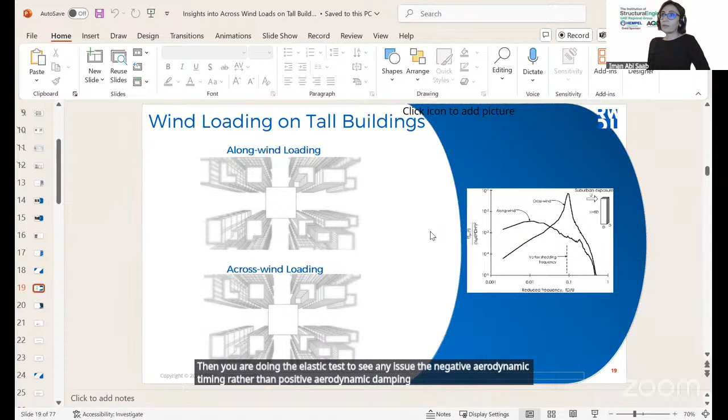Right, you have to initially do some computation and see the expectation, because if the structure is very slender and the Scruton number is very low, there's a chance of a lot of motion. Then you do the elastic test to check for negative aerodynamic damping rather than positive, because otherwise you're predicting the response from a rigid model test. If you do an elastic test, and there's potential for negative aerodynamic damping, your response can be higher compared to a rigid model test.

So that is something to be watchful of. What one has to do is look at the Scruton number first, see where you land, look at the shape, and then decide what is the best option. Because if you're expecting super tall buildings with a somewhat higher Scruton number but it's very slender, there is a chance of aerodynamic damping.

For instance, based on my experience, you can get anywhere from 0.5% to 1%, which is a possibility. So it's not small actually, it can be a sizable contribution which can reduce the load. Of course. Very good to know.

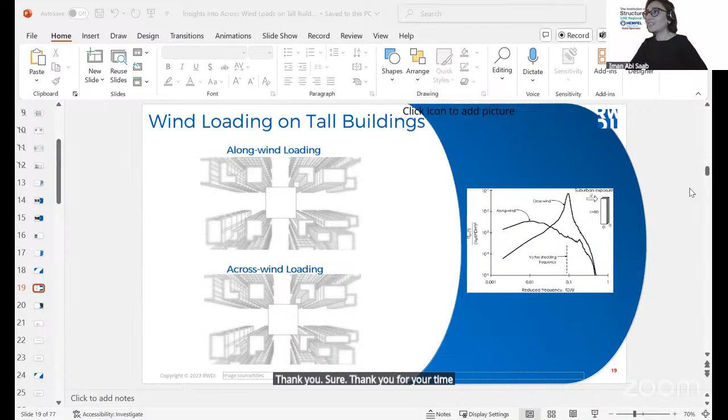Yeah, we can leave now, Dr. Suresh.